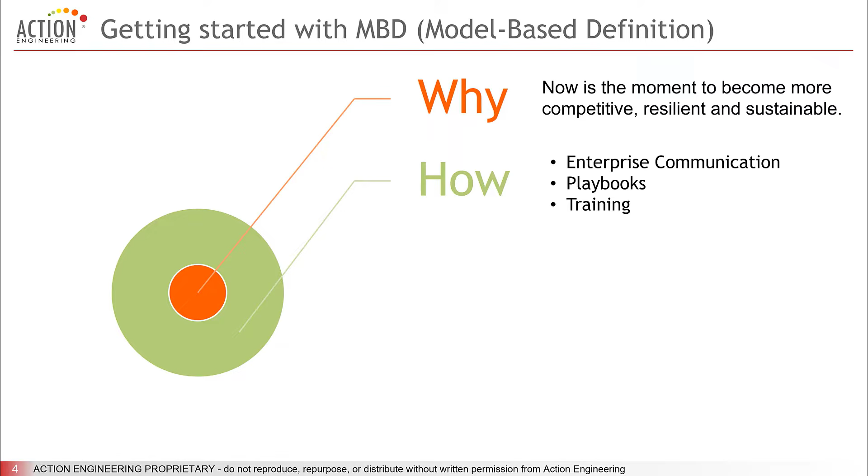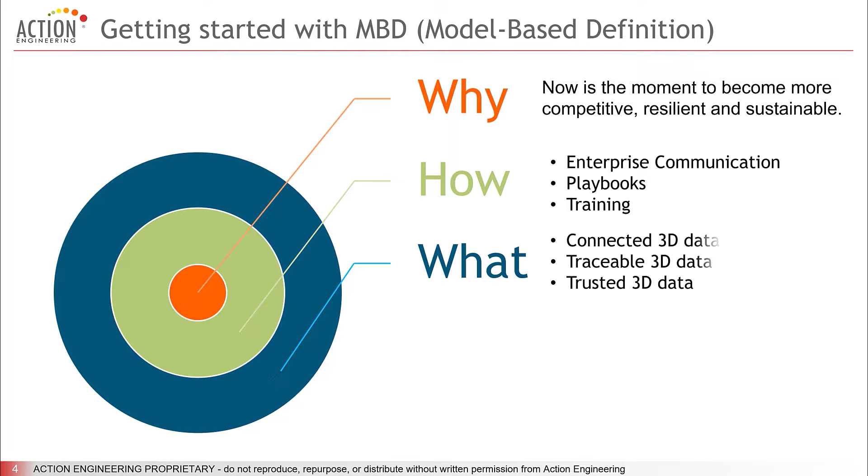So you will need a cross-department, highly functioning MBD implementation team, and their key focus should be communication across the enterprise, authoring thorough and vetted playbooks, and fostering an education strategy that renovates your culture to using 3D data over 2D drawings. What is the result? Connected, traceable, and trusted 3D data.

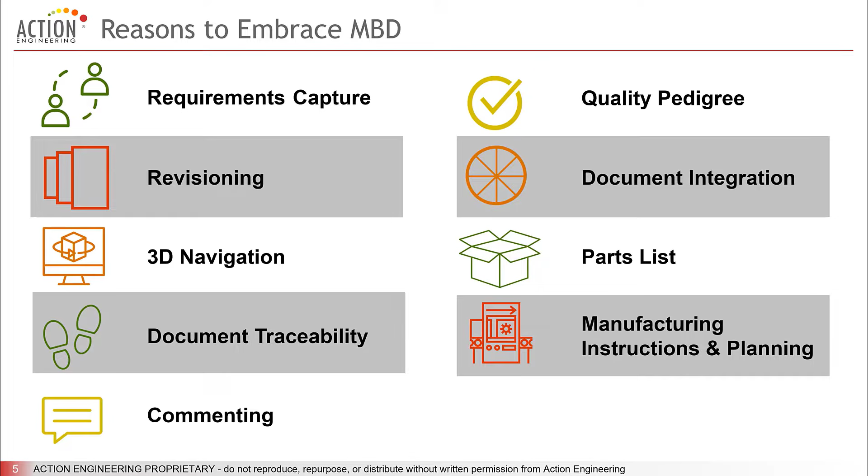Let's go deeper on why MBD is worth doing. Here is my list of what capabilities improve using MBD: requirements capture, revisioning, 3D navigation, document traceability, commenting, quality pedigree, document integration, parts lists, manufacturing instructions and planning, and CAD reuse.

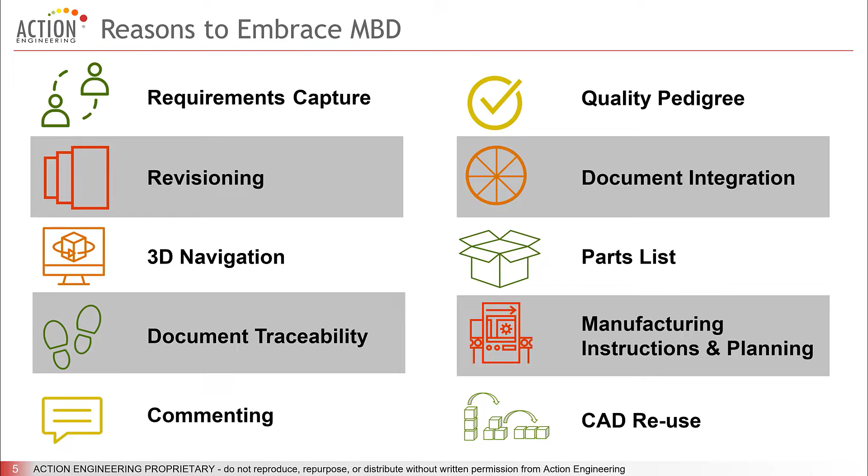You will see these manifest through the rest of the talks today. Make some notes for yourself and keep an eye out for other messages that resonate with you and your organization around the benefits, or the why, of MBD.

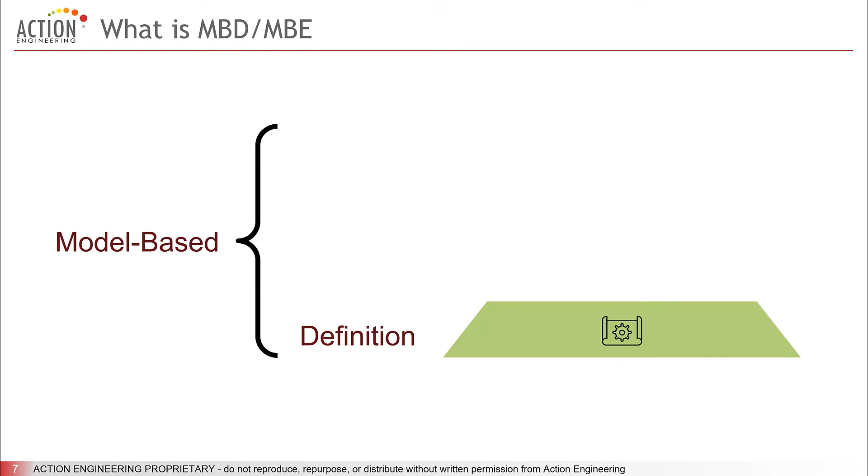Let's go even deeper. Per ASME Y14.47, model-based definition is an annotated model and its associated data elements that define the product in a manner that can be used effectively without a drawing graphic sheet. Model-based definition is the result of a methodology within engineering that keeps the digital model central to all design activities.

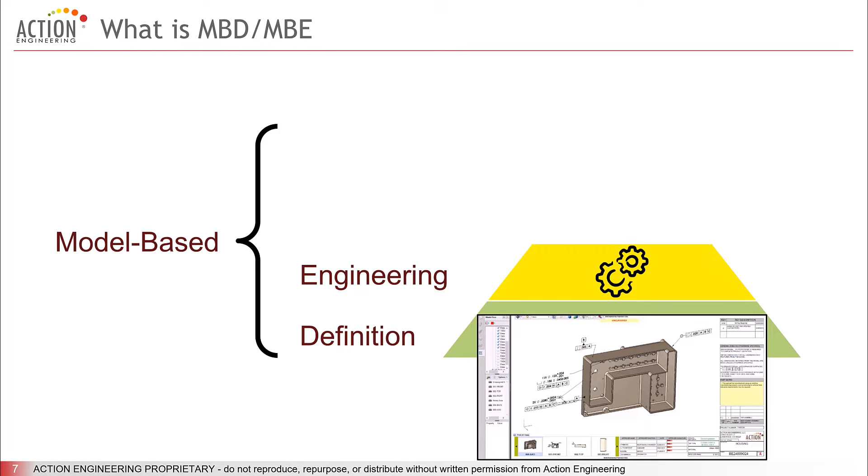Model-based engineering is a process that governs how the digital model is developed, manufactured, and flows through the life cycle. This is often referred to as the digital thread. A model-based enterprise is an organization that uses a model-based engineering process approach and uses model-based definitions for the purpose of commission, operation, service, and decommission of a product.

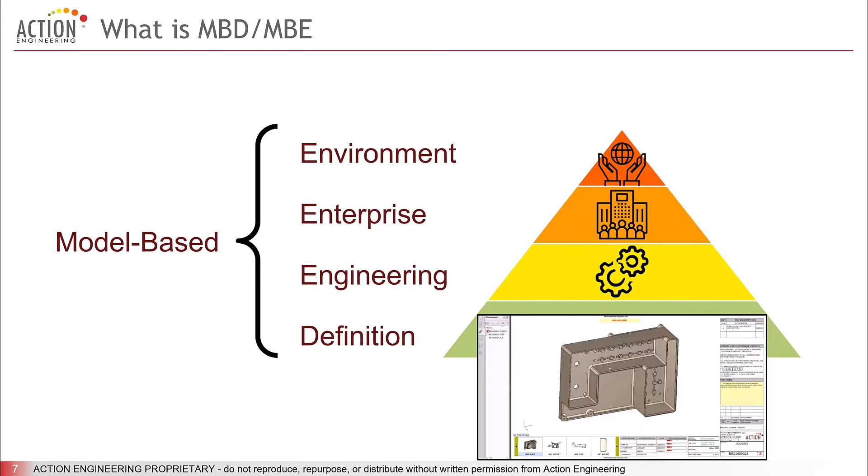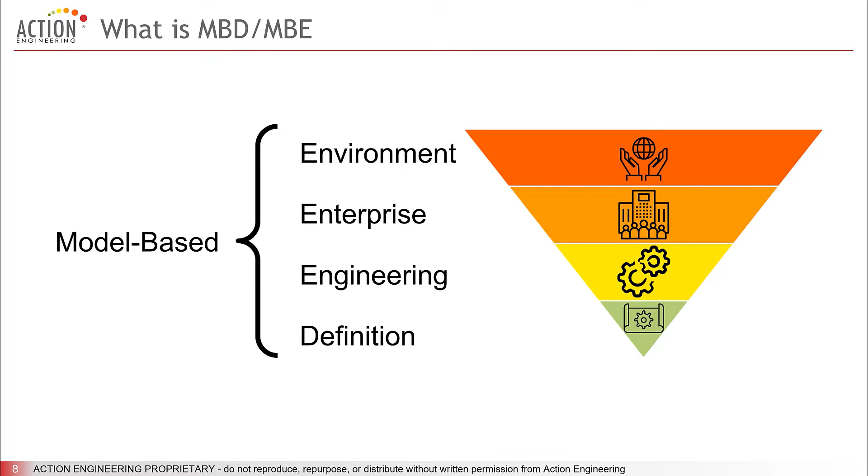And finally, a model-based environment is an ecosystem defined by software, hardware, infrastructure, and people that supports both a model-based engineering approach and a model-based enterprise. When it comes to the level of effort for implementation and the synergistic effect that going model-based has on an organization, MBD is just the tip of the iceberg.

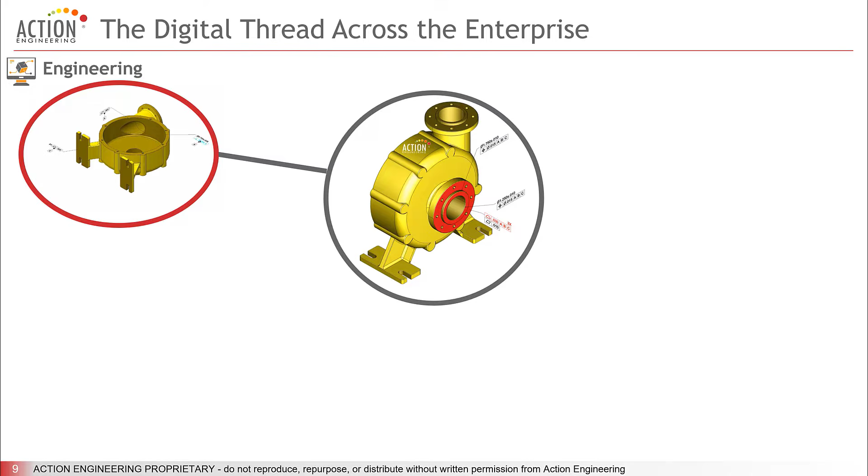You've likely heard the term digital thread or digital twin. These are big concepts that describe our collective vision to connect together digital data. The functional areas that use 3D data today are engineering, manufacturing, quality, suppliers, and analysis. There are many 3D data sets you can use across the life cycle of any part. They vary by industry and tool suite.

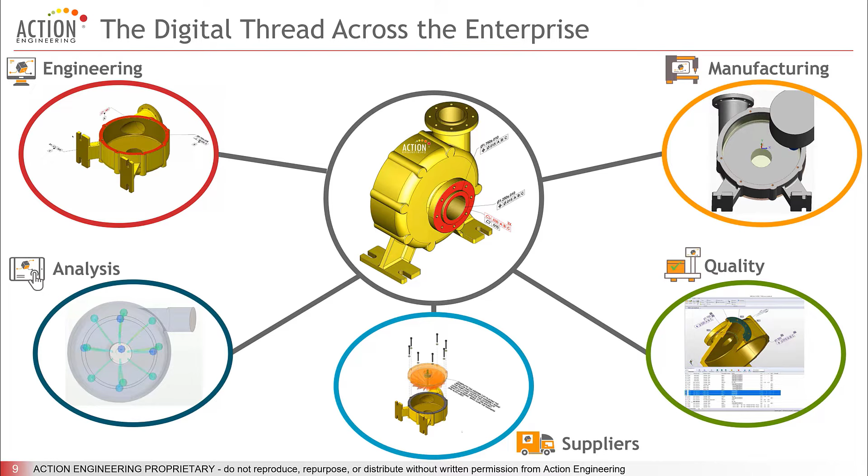The goal of the digital thread is to digitally connect trusted data with other organizational information to create a consistent, data-rich thread that provides value to your company and maximizes your software tool investment. If we connect other organizational data alongside MBD data, then we create the beginning of a model-based enterprise.

Data that is reused is data that has value because it informs good decision making, which in an organization is always needed to maximize the bottom line. So data collected and not reused has limited value to the organization because it must be recreated or does not provide a return on the effort of collecting it.

An example of data that has limited value today is the common practice of relying on 2D static drawing information alone. 2D drawings are often printed on paper, digitally disconnected, and out of date. 2D drawings create inefficient schedules as traceability relies on manual data entry and revision distribution is physical.

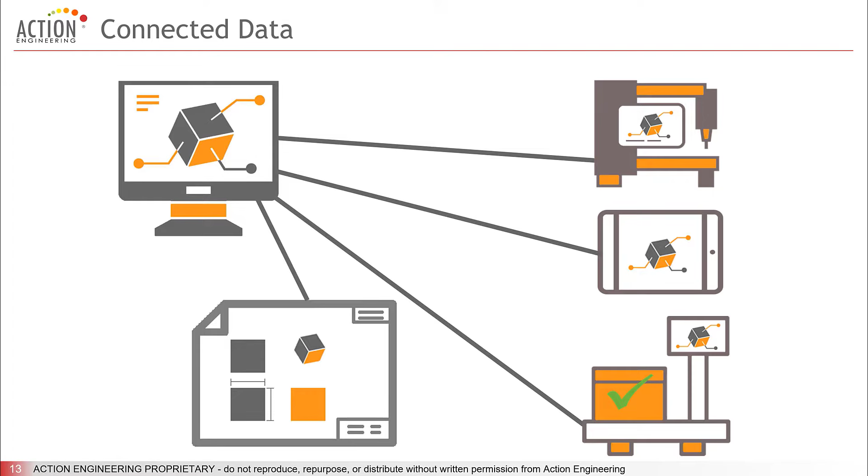By digitally connecting to the source design model, there is an opportunity to introduce new workflows that reduce ambiguity, reduce data input errors, increase traceability, and improve efficiency. With MBD, our data that is reused, meaning MBD 3D data, has more value than a 2D drawing.

Organizations undergoing a digital transformation are also considering upgrades to their fabrication operations. Today, many of those connections are manual and rely on people physically carrying drawings around on the shop floor.

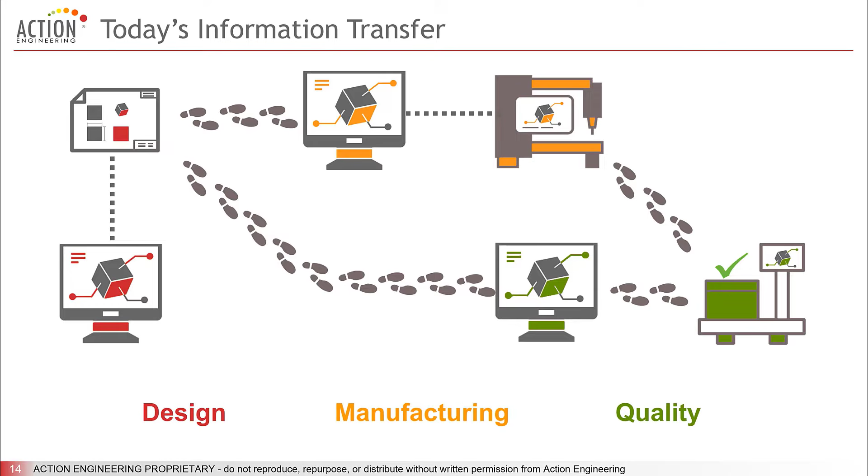Data reuse for MBD means we maximize machine consumption, increase organizational collaboration, and engage typically siloed business areas with a holistic approach to interconnected data.

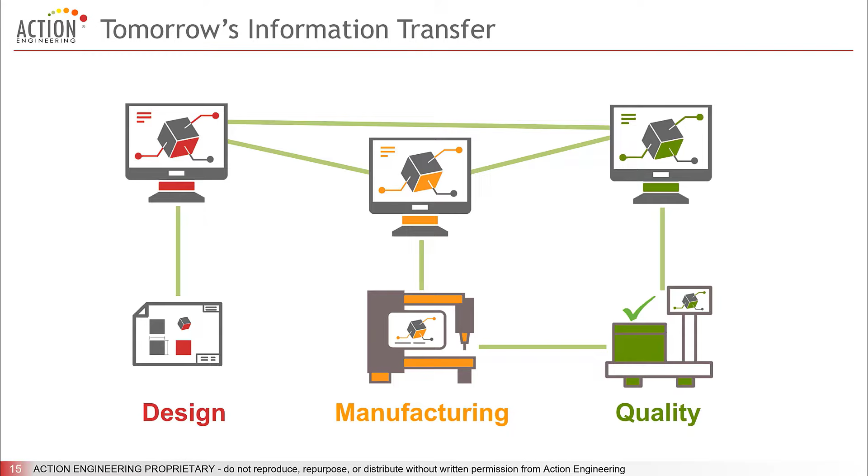Let's go even deeper and compare a drawing with model-based definition. A drawing is a static, two-dimensional presentation of geometry and annotations. Often these drawings are fraught with ambiguity. My biggest pet peeve of drawings is that they are often faxed to suppliers, and the low resolution of the facsimile muddles the certainty of the leader lines associated to the geometry for dimensions, leaving the supplier confused and uncertain.

Drawings require a human to read them and input the information into another system. In fact, we have analyzed that there are 6 to 20 manual handoffs during any one OEM to supplier interaction for a single product. So that's a lot of manual handoffs, leaving a lot of room for error. Anything we can do to eliminate manual handoffs helps reduce the cost of poor quality.

Look at the MBD. It's rotatable, zoomable, and queryable. It is a combination of geometry, annotations, attributes, and presentation states that are digitally captured. Because the model is digital, this means everything is captured in ones and zeros, and humans are not required to interpret what that data means. Nor do they have to re-enter the data from one system to another. Metadata and engineering requirements can flow from the MBD into manufacturing, quality, and ERP systems.

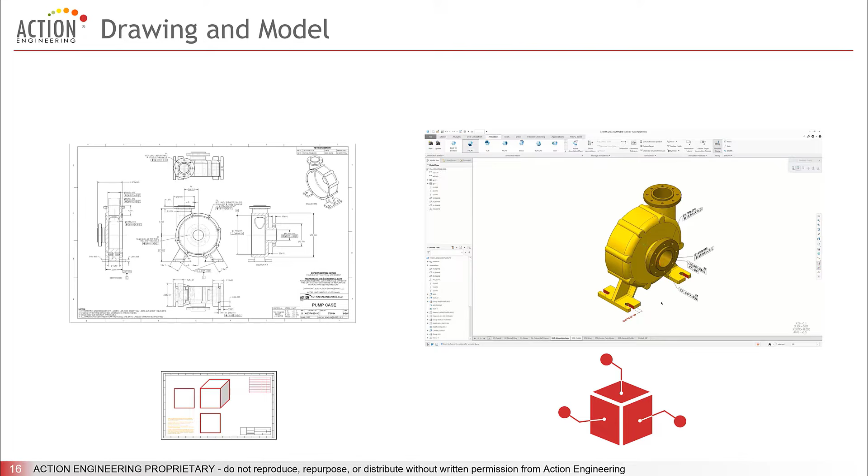And my favorite thing about MBD is I never second guess myself about where a leader line is pointing because it highlights the represented geometry. The accuracy and dynamic viewability of MBD information makes me trust 3D data much more than I ever trusted 2D drawings.

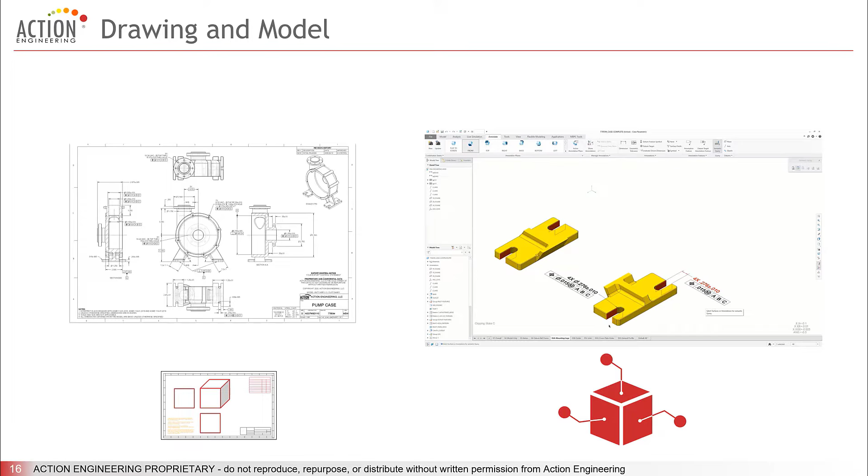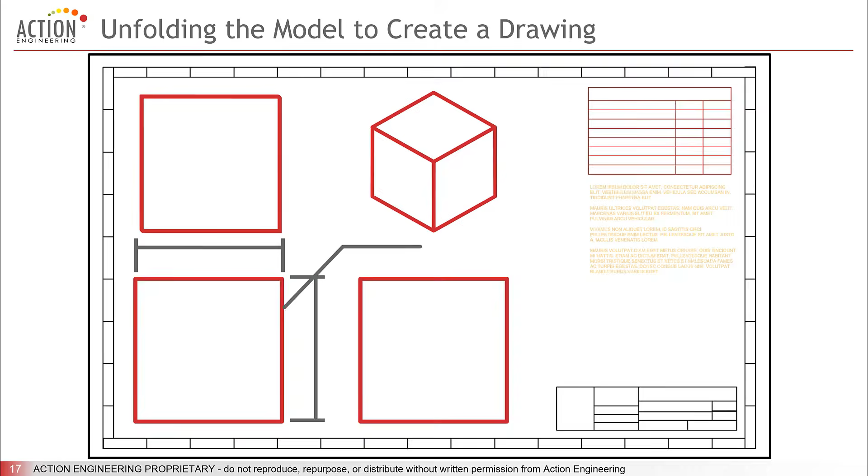To further convince you that 3D data is more valuable than 2D drawings, let's look at the common practice that goes on today to create a drawing. A designer or product definition practitioner creates a 3D model today, then they use the CAD software to unfold that model to create a flat, static 2D drawing. Shouldn't we just leave the data in 3D instead of performing that extra effort? It's not like we don't all carry computers capable of viewing 3D in our pockets. Oh, wait, yes we do.

Okay, we went deep into MBD, but let's talk now about how we control and protect all that digital data. The digital thread and MBE are based on having a single source of truth for your products. That does not mean there is one 3D model to rule them all, but rather an established system of master authoritative data sources that flow through derivative data to machines and humans who consume that information. However, interconnected, searchable, and democratized data does not mean that all data is available to everyone all the time.

Access control is a key feature of the connected enterprise and determines who may see data, who may change data, and who approves the data. Data stakeholders have access to released and authorized data appropriate for their needs. The philosophy of model-based definition is not just to use MBD in engineering alone, but to reuse 3D CAD data throughout enterprise functions and into the supply chain. Data-rich threads of connected, trusted data provide value.

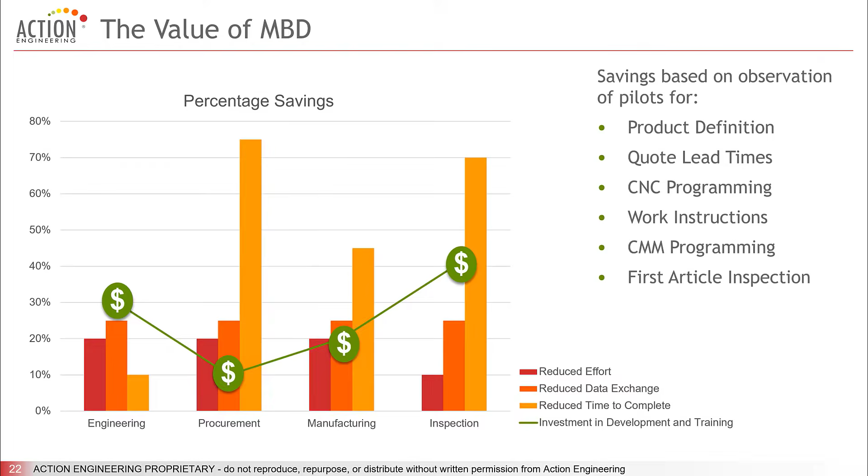Of all the MBD implementations I've seen, the technology varies, but the need to teach people how to utilize the new way of doing business is always present. Understanding the people in your organization really do make or break technical projects. Organizations that succeed in this complex transition take the time and effort to integrate cultural as well as technological changes. This certainly applies to all organizations. And my key advice for MBD implementers is plan your pilots carefully, train according to the needs of the people, and communicate and create paths for feedback.

In the following sessions today, you will hear stories about real companies implementing MBD. Listen carefully to their successes, but even more carefully to their challenges. Their perspectives will inform your strategic implementation plans. There's no right or wrong way to achieve MBD. There is only the way that brings you the results your business needs.

So what is MBD? It is connected, traceable, trusted 3D data. How do you achieve it? Communication, communication, communication, communication. Humans have to hear, see, touch, and interact with MBD before they feel the benefits and understand what is in it for them. And finally, why should you do it? Every company is rethinking their strategies due to last year's pandemic. MBD is a foundational capability that achieves operational resiliency. Empower your enterprise with connected, traceable, trusted 3D data.

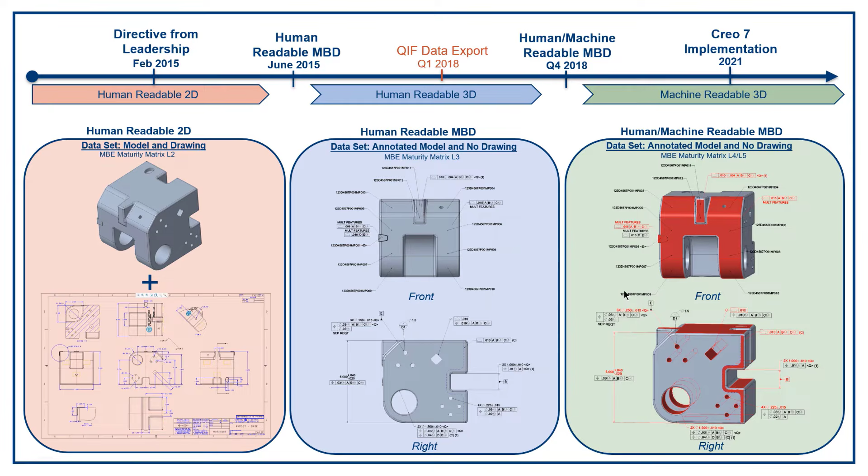And this is key. This is key to unlocking the doors to your digital enterprise and making sure that it is successful. You need to implement a human and a machine readable strategy. And so now every annotation, whether it's GD&T, coordinate linears, whatever phase you are in this process, make sure that all the semantic references are there to complement. And whatever input you're trying to feed to a downstream software, that should come from your authoritative model.

Let's talk about the digital enterprise. I've referenced the term digital enterprise multiple times now, and so let's define it. At GE Appliances, we've defined the digital enterprise as an organization that uses digital models to conduct business activities generating a traceable digital thread.

So when we think about digital models, that's this down here. We can think about our digital product or our authoritative CAD model. And we know that we're doing things in model-based definition, and that's the key here to the digital enterprise. And all of our product definition is machine readable inside of this authoritative CAD model to be leveraged throughout the digital enterprise. So from concept to production, we have various different business activities that we can perform where we can leverage this authoritative CAD model.

And we're going to create a traceable digital thread. And within that, we have the enterprise, we have lots of data that can flow and is flowing. And in some cases, we have data that's flowing in two directions. For instance, we could use 3D tolerance stack-up analysis software that can read this authoritative CAD model, this PMI, to automate the modeling of this analysis. The same thing with real-time simulation that's embedded right into Creo using ANSYS. We can use those types of tools to perform these business activities that are connected to the digital thread.

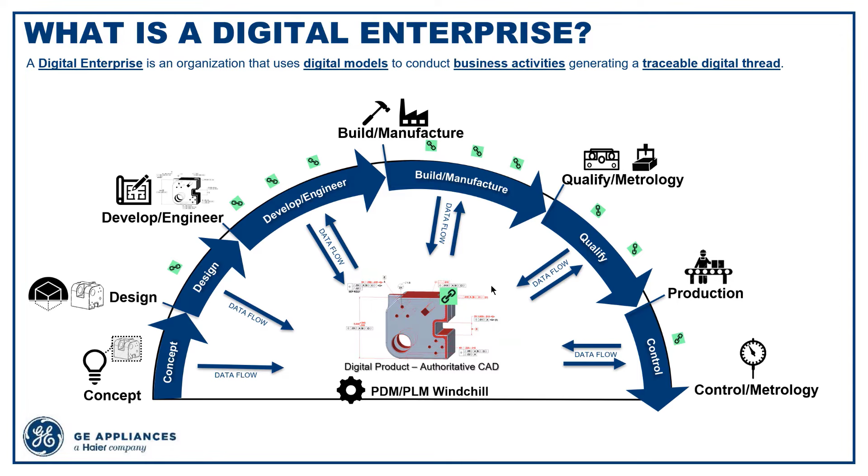Same thing within build and manufacture for our virtual manufacturing, virtual builds. We can use QIF workflows for our qualification efforts and metrology. So we have data that's flowing all over the digital enterprise. And within these business activities, we want to make sure that we're creating a traceable digital thread back to the authoritative CAD model. And we want to be sure that the inputs these softwares require, when they can, are coming from the authoritative CAD model. We do know that other pieces of information need to come from other sources, but where we can, we want to make sure they're coming from the authoritative CAD model.

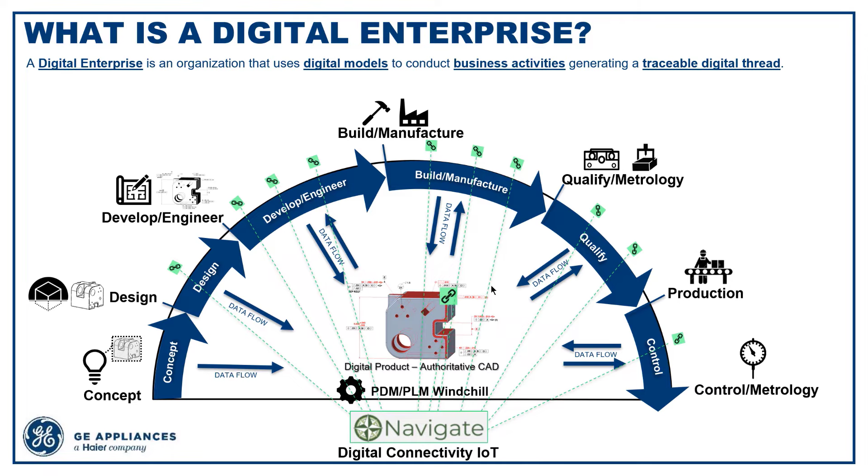And then we can use softwares like Navigate. We call this digital connectivity. So Navigate is an IoT platform software where we can use this to kind of glue together all of this data, this digital thread, and have it available at the fingertips of our engineers.

Let's look at the digital enterprise, a model-based enterprise, in a different way. Thanks to Action Engineering for sharing this slide. And I encourage you to reach out to Action Engineering as they're very versed in this space and they can help coach and mentor you along the way.

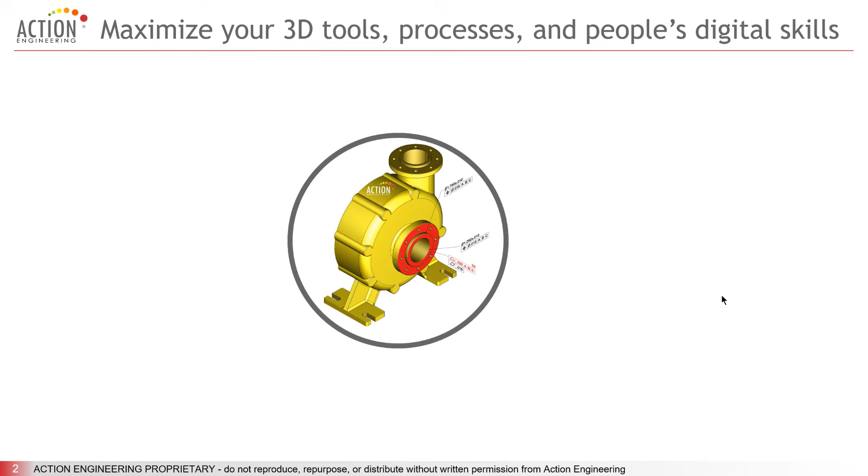So looking at all the various different areas of the business. We talked about from concept to production, the business activities, but there's lots of areas of the business that are affected, like design, manufacturing, quality, suppliers, and any analysis that you want to perform throughout the part's or product's lifecycle. It's important for you to identify areas of your business that you want to grow digitally. So as we talk about becoming a digital enterprise, we need to identify the areas of the business that can leverage and maximize the 3D tools you already have in place, that can read this product definition, to streamline various different processes and maximize people's digital skills.

As an example, moving to model-based definition has improved our communication with our suppliers. It took some coaching and mentoring at first because we changed from a two-dimensional data set to a three-dimensional data set. But we showed them we can extend the benefits of model-based definition and our digital enterprise to them. On top of that, instead of giving them a two-dimensional derivative, a dead-end derivative, we're now able to give them a Creo View or a 3D PDF that communicates semantic references and removes any ambiguity they may have in interpreting our product definition. So identify the areas of the business to leverage this same technique and same ideas, to showcase the value and to gain leadership buy-in.

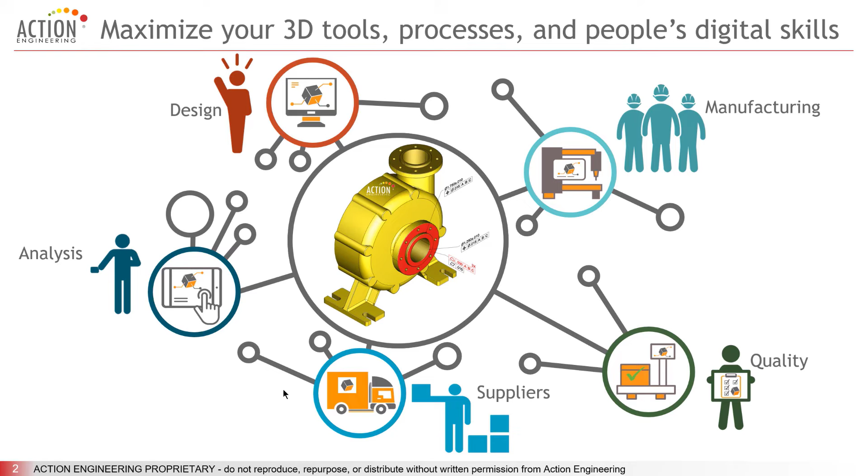Let's take a few minutes and talk about MBD. I know many of you are beginning your model-based definition journey. And we're throwing a lot at you with creating model-based definition, making sure that it's machine readable, and finding softwares that can read and do something with this data. And it's something that you have to take in steps and in strides. But when we educate our business, it's important for us to break down model-based definition. The pieces of information that our digital enterprise needs, I classified into three different categories.

Geometry. I think as soon as the first 3D model was created, we've been leveraging geometry throughout our enterprise, and we're very good at it. Where we need to become better and where model-based definition helps is PMI, that's product and manufacturing information. PMI is simply all of the dimensions and tolerances and notes, whether it be local notes, that define product definition. And then also notes and title block. This is also embedded inside of the MBD model, but it communicates material, appearance, texture, standards, and any testing that's needed. This can be implicit or explicit information, whatever your strategy is.

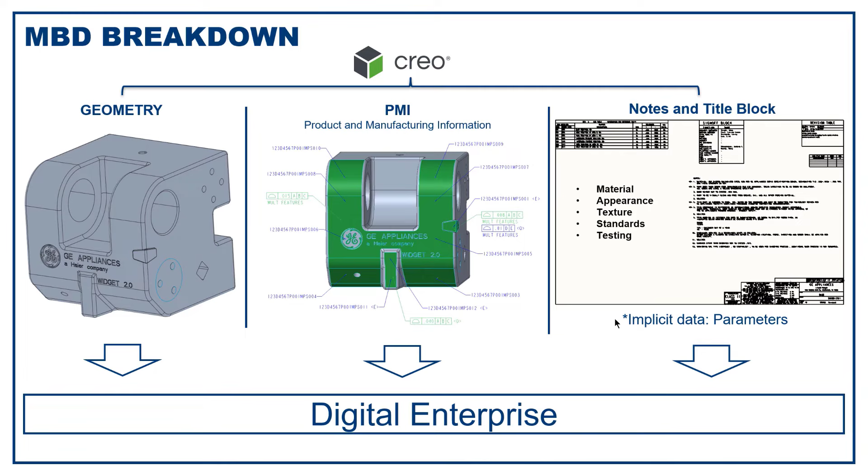That's something that you have to define as an organization, but make sure that the mind frame that you have is that it complements the digital enterprise and the areas of your business that you want to affect. Let's talk about the business impact, right? That model-based definition versus the two-dimensional drawing. I think you get the idea that model-based definition is more superior than a two-dimensional drawing. But I want to show this visually, right?

And I also want to state that creating a three-dimensional model and a two-dimensional drawing takes more time. It's more data that we have to manage and the linkages within your PLM system than creating a machine-readable model-based definition. On top of the benefits that we've already discussed throughout this discussion, look at the impact shadow that a machine-readable MBD database has on the organization and our business versus a two-dimensional drawing driven by a 3D model, right?

The business impact areas, you guys can define that within your organization, right? But the benefits, you can't deny this, right? We're communicating design requirements through a single source of truth. We have increased efficiency. We're doing more with less resources because we're streamlining workflows. Less derivative data set creation, right? We're reusing our CAD data. That's unheard of, right? We weren't reusing our CAD data hardly at all when we're driving a two-dimensional drawing.

We have increased interoperability downstream, right, between our softwares, and it will only continue to grow as more softwares are integrated into the digital enterprise. We have better data faster, right? Making better decisions. And we're faster to market because of it. If it takes me less time to create machine readable MBD than it does to create a 3D model driving a two-dimensional drawing, and I gain all of these benefits, it's something that's definitely worth looking into.

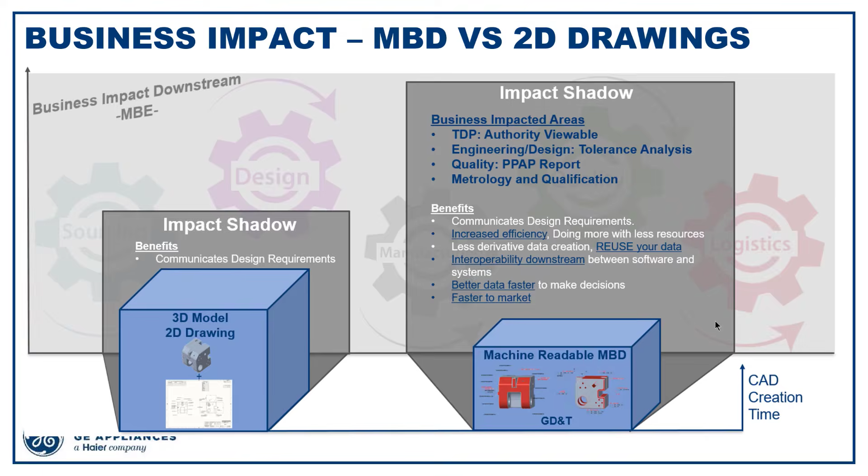Well, thank you, Evan. This was very insightful, and it's clear that organizations like GE Appliances can benefit a lot from such digital transformation to MBD. Let me ask you a couple of questions about the journey and the process that your company took. What would you say were the major roadblocks and challenges you have encountered during the process of adopting MBD in your organization?

So when adopting model-based definition within your organization, there's two roadblocks that come to mind. So we need to upskill our personnel. So that way we need to train them and educate them in how to author machine readable PMI. And also we have to train our organization, who are the interpreters, on how to read the machine readable PMI. And we also need to educate them on the benefits of machine readable PMI.

Why are we moving from a 2D data set to model-based definition? And when we educate them on the benefits, right, they're more on board and accepting to this new process and this new change. So we need to articulate the value of model-based definition within the enterprise. Perfect.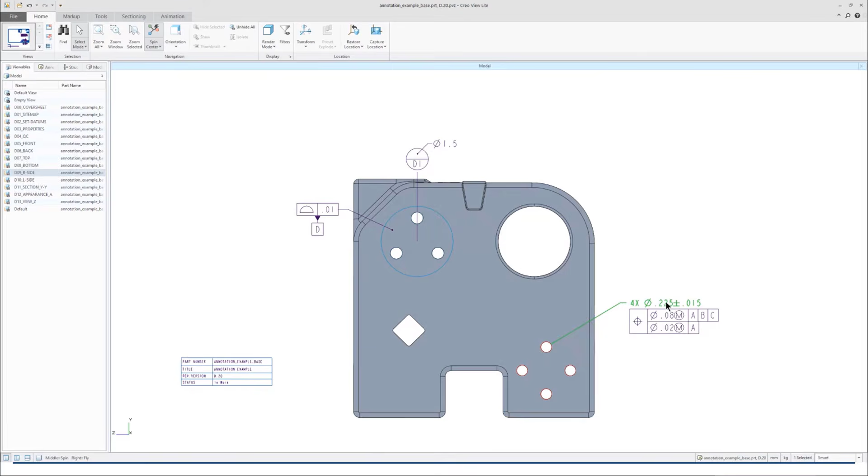And one of the values of assigning semantic references and making our PMI machine readable is that when I select the annotation in, say, Creo View, you'll notice that I have all the semantic references that complement the function of this annotation highlight. And it's the same thing with the positional tolerance, the functional features that are associated to this highlight. And I can do that for many different things as I make them machine readable, right?

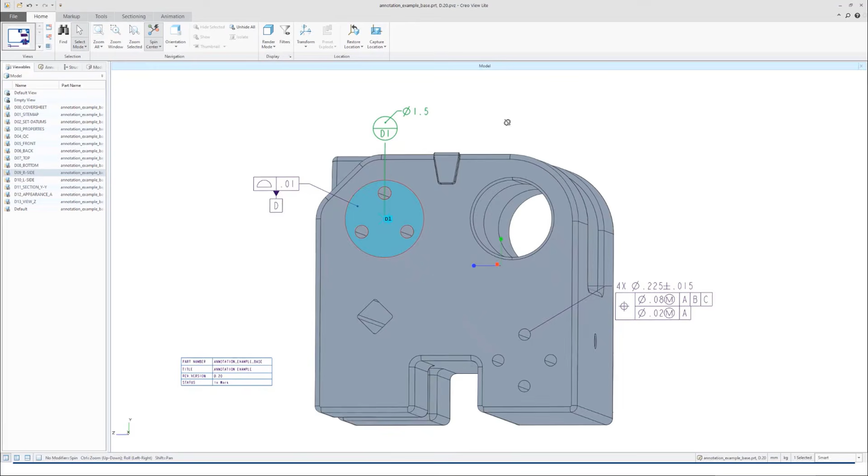So datum target D1 is an area, right? A cylindrical area of 1.5, and here is that area, it's highlighted. And here is a profile tolerance that's associating how much surface deviation that area can have. And I have all of that being expressed here through machine readability.

And so hands down, this is a way better tool for us to provide to our suppliers to showcase them the benefits. And so even if you use this as a simple tactic or a simple way to showcase the value, it removes lots of ambiguity from a two-dimensional drawing that a person may have when interpreting.

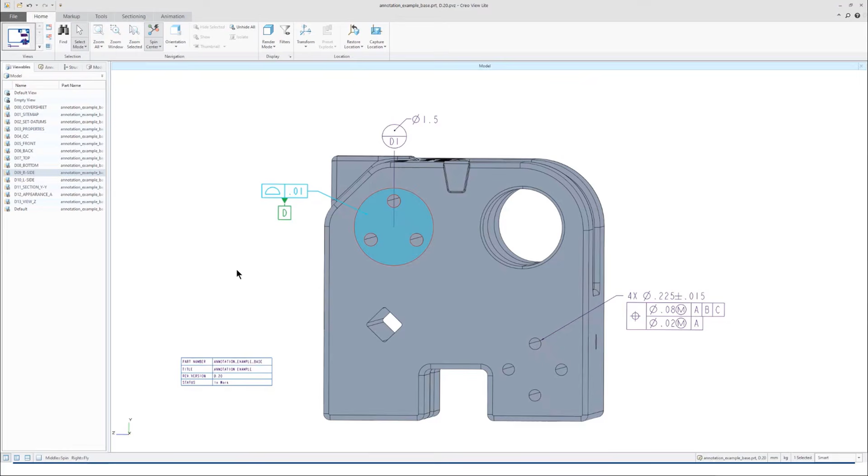Yep, great. Thanks, Evan. I guess final question I would have, probably many people who are watching us are wondering what should be the list of actions they could follow in order to correctly jumpstart MBD projects in their own organizations. Can you try to define maybe a suggested path and actions for them? Yeah, certainly. I think that for anyone that's wanting to dip their toe into the model-based enterprise pool, start small, right? And I think that that's key. Start small and identify a champion within your organization to kind of be the architect.

There's many different ways to implement a model-based definition strategy within Creo. And you want to make sure that that model-based definition strategy complements current software that you already have in your ecosystem within your enterprise. I would start off with small pilots, right? So identify key areas of the business to showcase the value of model-based definition and pilot those with something small, and educate those team members on those projects to get them on board to help showcase the value here as well.

Also, get leadership buy-in early, and I think you can do that through these small pilots and also showing the value of how you can leverage model-based definition, whether it's with a simple strategy like just through Creo View or a 3D PDF, or into tolerance stack-up analysis or whatever the strategy may be. Showcase that value and how it can streamline workflows. And then also, I would encourage everyone to use the MBE maturity matrix to understand where you're at today and where you want to go in the future. And I think you can use that as a good roadmap and a starting point.